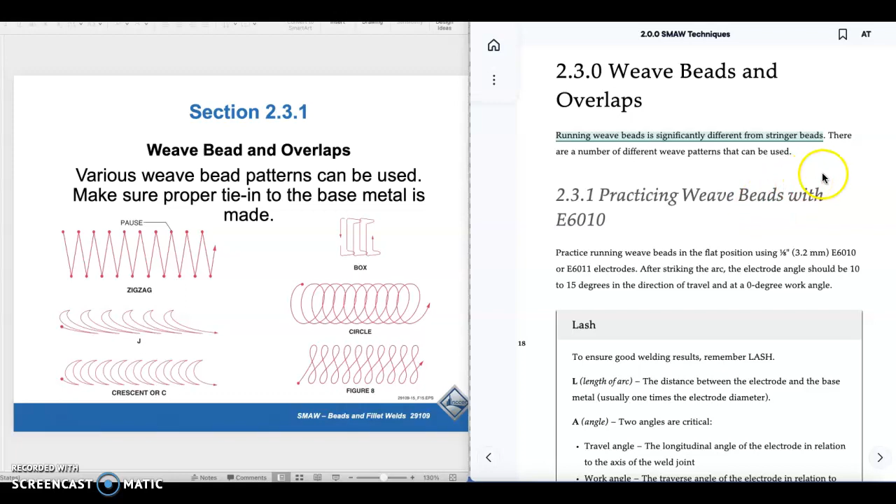Let's go ahead and start where we left off with section 2 of module 9, SMAW technique, weave beads and overlaps. Running a weave bead is significantly different from a stringer. There's a number of different weave patterns that can be used.

So practicing weaves with a 6010, practice running weave beads in a flat position using an 1/8 inch E6010 or E6011. After striking the arc, the electrode angle should be 10 to 15 degrees in the direction of travel and at a 0 degree work angle.

To ensure good welding, remember LASH. LASH is going to be some stuff that they're going to ask you about. So you need to know length of arc, angle, speed, and heat.

LASH: the length is the distance between the electrode and the base. We call it a tight arc. Keep a tight arc.

Angle: the travel angle and the work angle, the longitudinal angle of your electrode, and the traverse angle of your electrode in relation to the axis of the weld joint.

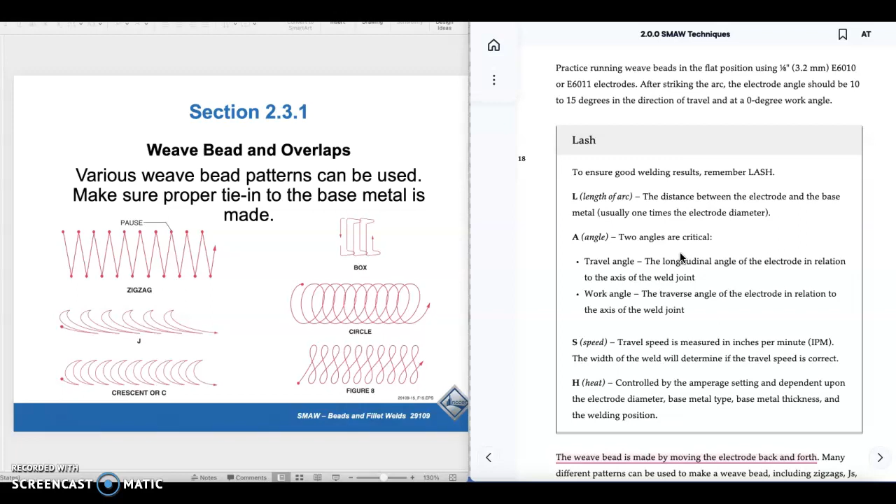Travel speed, we know what that is. Heat, that's your amp settings, depending on the electrode, base metal type, metal thickness, etc. Thicker metal, higher amps; thinner metal, lower amps.

The weave bead is made by moving the electrode back and forth. Many different patterns can be used in the weave: zigzag, crescents, boxes, circles, figure eights, upside down C's, right side down C's, you name it.

Essentially they're all some sort of a side to side that massages and manages the puddle. That's the bottom line. At the end of the day, that's what you're doing.

You're wanting to make sure you're filling in your undercut, and you're wanting to make sure you're getting good penetration. You're not overheating your metal. You're not going through the metal. You're getting proper penetration.

All those things rolled up along with the way that you manipulate your rod is a component of the weave.

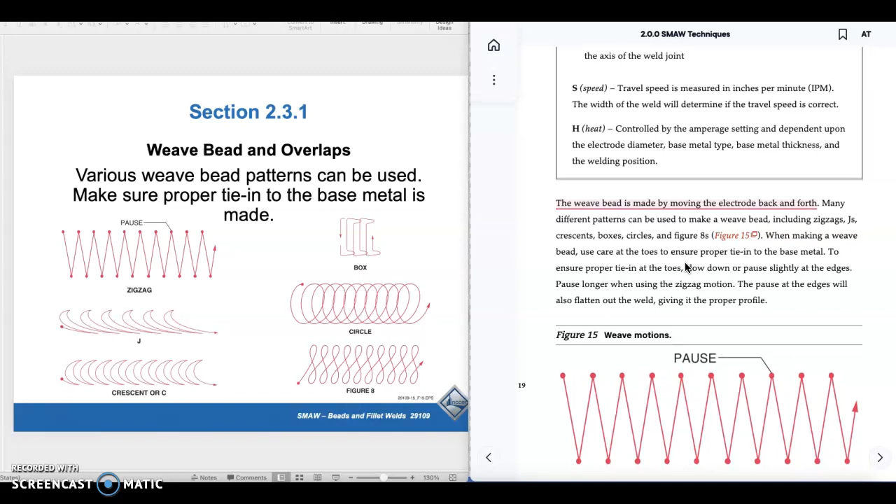So there's some examples of pause at the sides, the zigzags, the J's, the crescents. Some of these are just going to be dependent on the position that you're in, and you're going to try different things.

And some things you're going to try, it's like, I've never done this before, let me give it a try. But depending on what position you're in, what kind of metal you're working on, there's just the variables.

You can look at a puddle long enough and eventually you just develop your own. Don't take all these positions as this is it. You got to learn these. These are examples. You learn and develop your own and what works good for you.

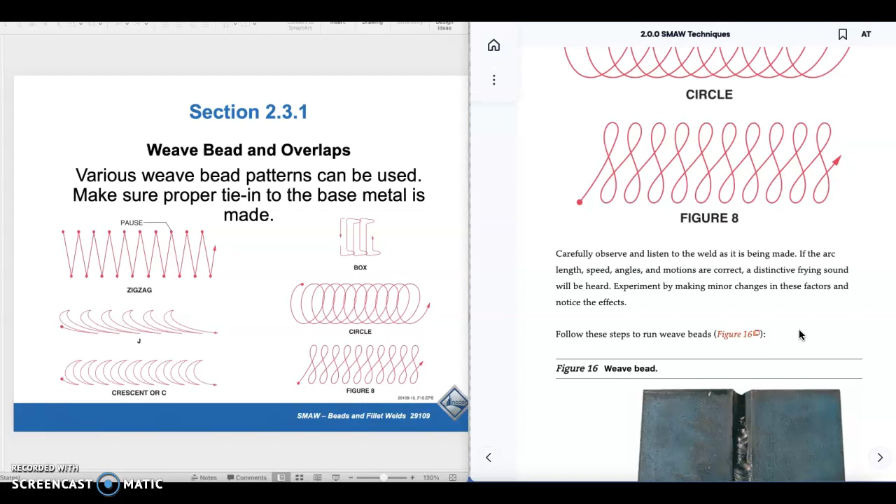Weave bead. Here's this groove weld, and looks like it's got a backing strip, or it's got a real tight root face, root opening.

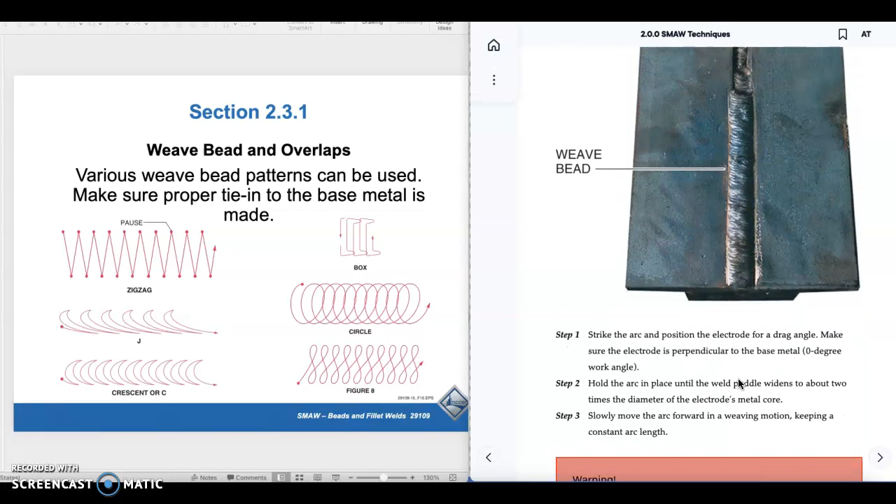Looks like a single pass weave bead, which is kind of a no-no. You want to see multi-pass. Strike the arc, hold the arc, move the arc.

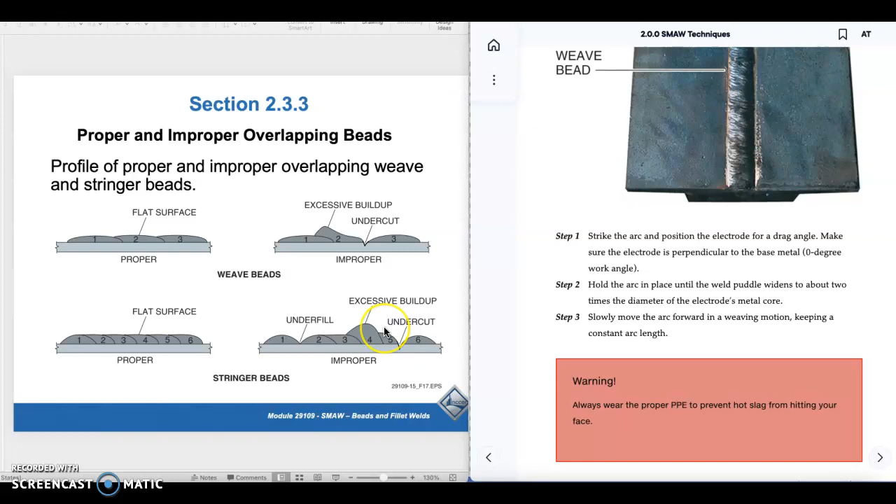Electrode work angle. Here's a pad of beads. Work angle and arc control are important for overlapping beads using 7018 electrodes.

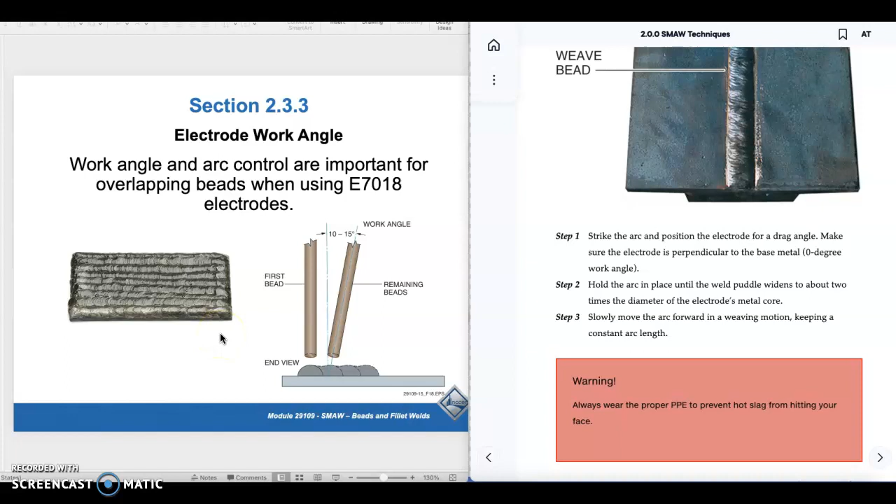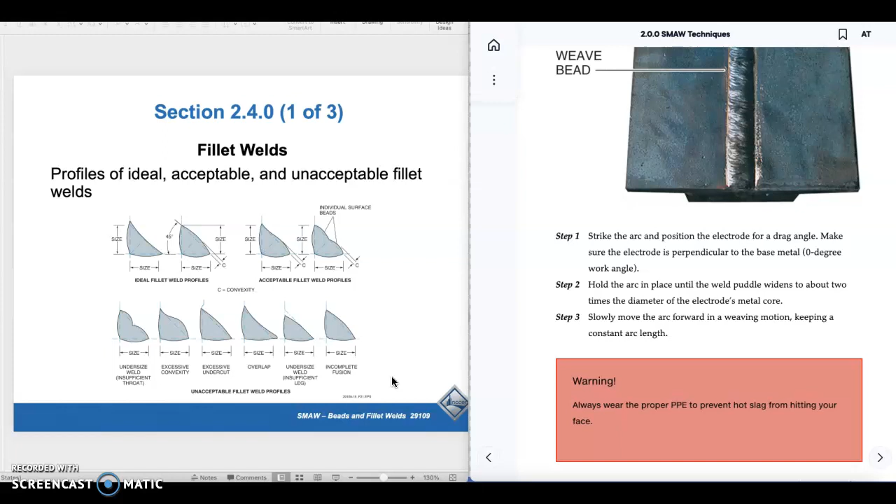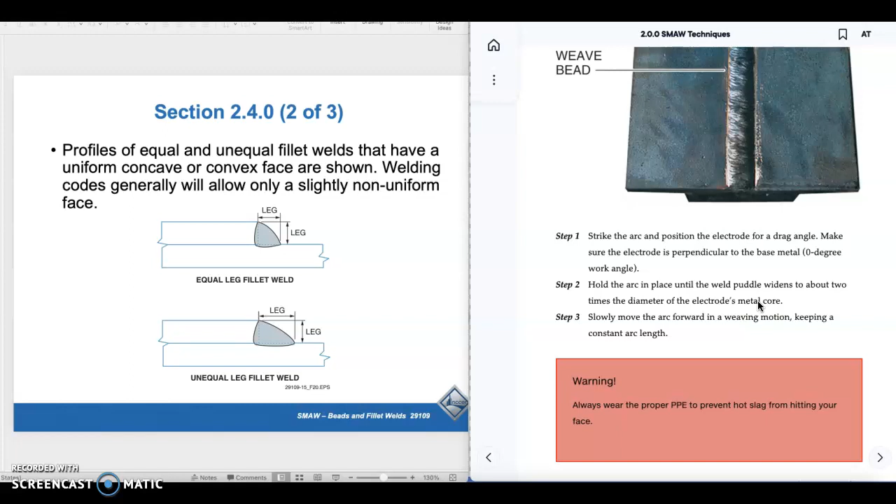Profiles of equal and unequal fillet welds that have a uniform concave or convex face are shown. Welding codes generally only allow for slightly non-uniform... okay, I think I'm getting a little ahead on the left, so let's catch up on the right.

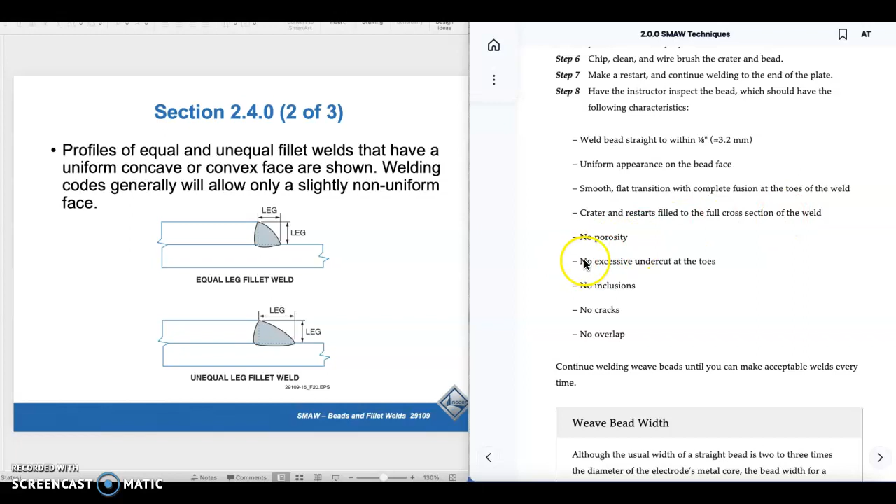Keep your bead straight, uniform, smooth, flat. Craters and restarts have to be filled in. No porosity, no excessive undercut, no inclusions, no cracks, no overlap. We know all those terms and know what to do with them. Continue welding weaves until you make acceptable welds every time.

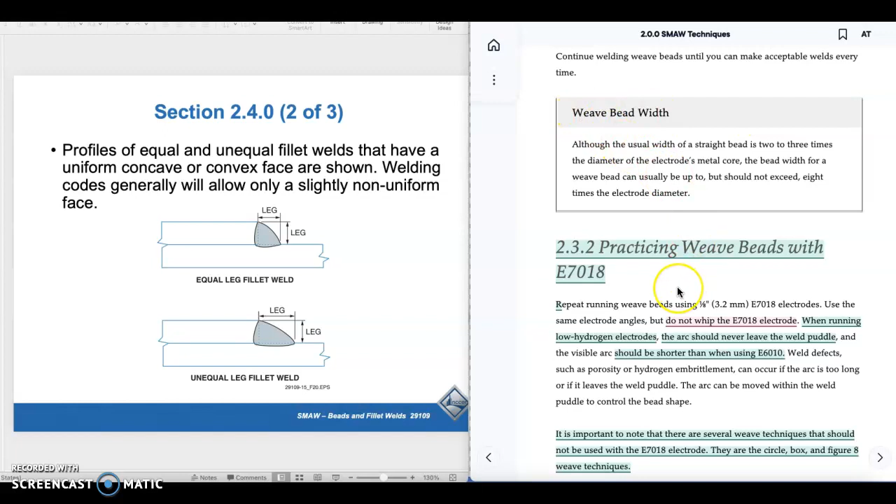Practicing weave beads with 7018. Do not whip it, it's more of a side to side motion. Bottom line, just keep the electrode in the puddle. Don't let the electrode leave the puddle. That's the number one thing you've got to remember.

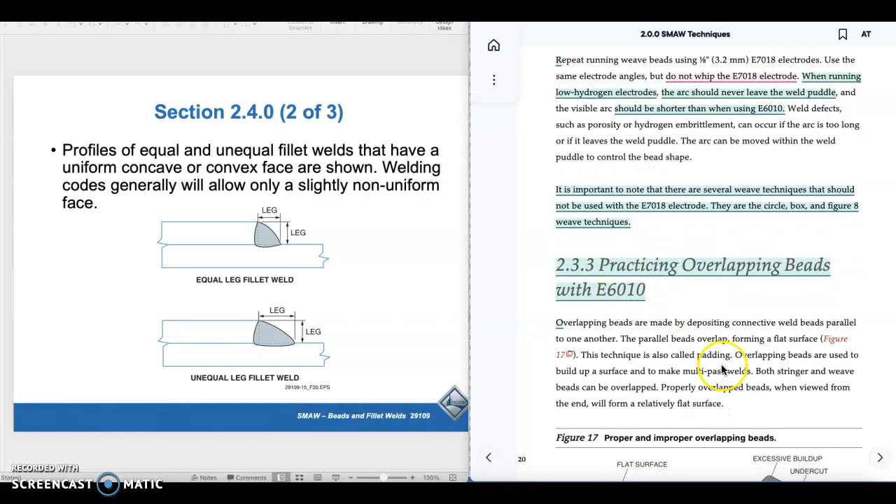In addition to not whipping it, anything excessive with the 7018 is going to give you a less than desirable result. Weld defects such as porosity and hydrogen embrittlement can occur if the arc is too long, or if your rod leaves the weld puddle. The arc can be moved within the weld puddle to control bead shape. It's important to note that there are several weave techniques that should not be used with the E7018 electrode.

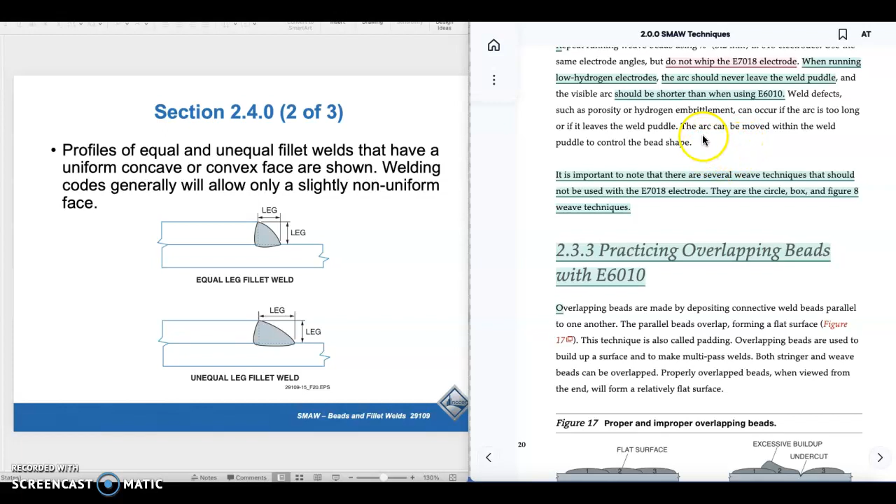They are circle, box, and figure 8 weaves. That's probably because you end up leaving the puddle. I am a big fan of that upside down C, like I'm doing with my mouse right now. Up, up, up, pause, up, pause, up, pause. Your electrode is always touching the puddle, touching the puddle, touching the puddle.

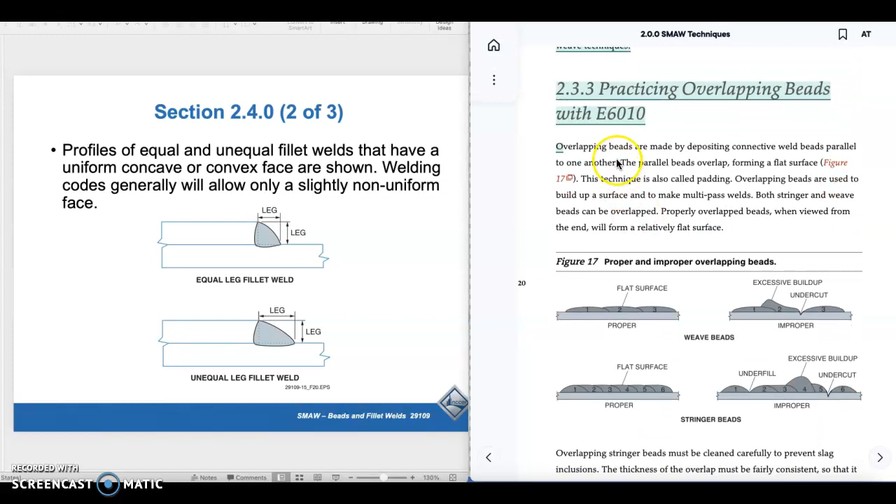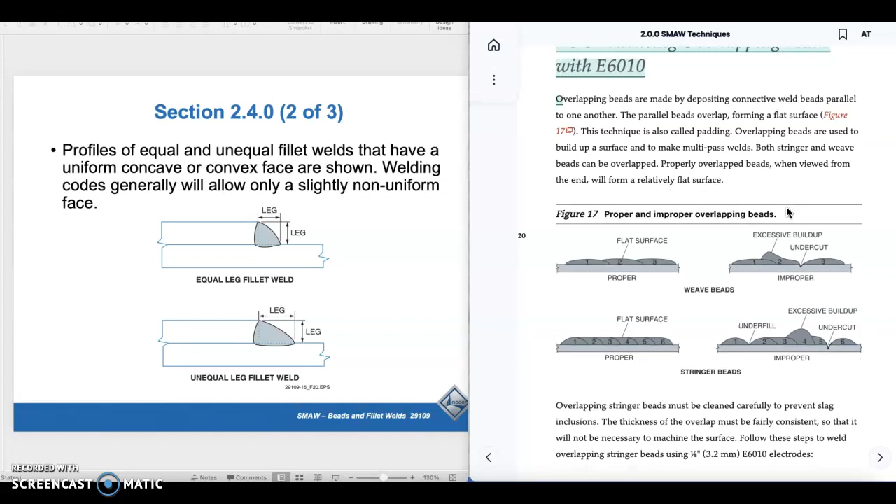That works really good, or just straight drag it. Overlapping beads with a 6010. Overlapping beads are used to build up surface and make multipass welds. Both stringers and weaves can be overlapped properly. Overlap beads, when viewed from the end, will form a relatively flat surface.

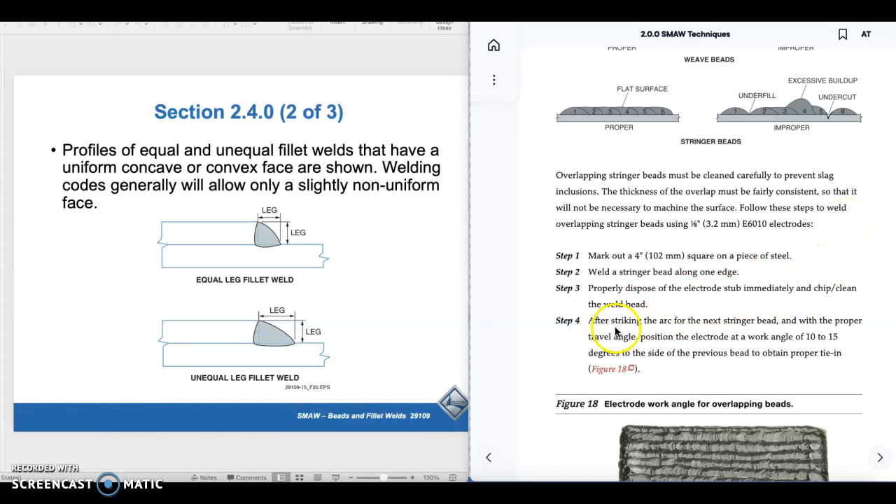Mark out a 4-inch square on a piece of steel. Weld a stringer bead along one edge. Properly dispose. After striking the arc for the next stringer, use a work angle of 10 to 15 degrees.

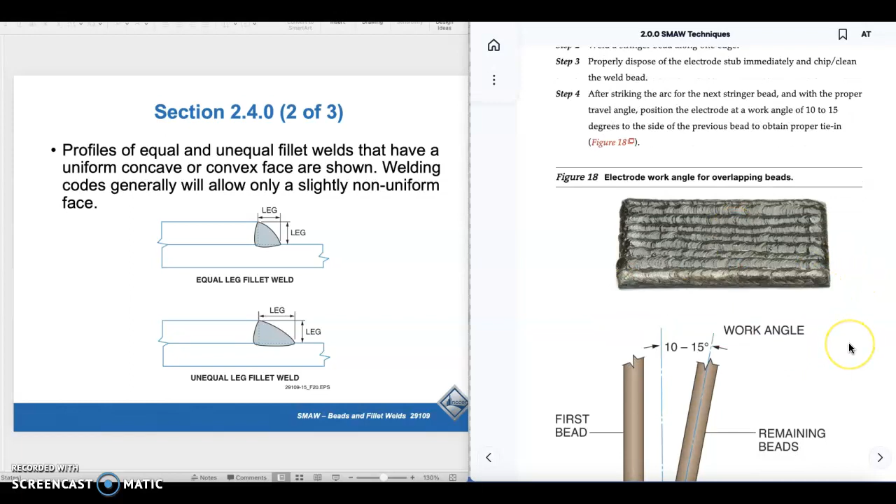Pad of beads with 6010. Basically it's the same rod angle. Continue running stringers until the marked square is covered.

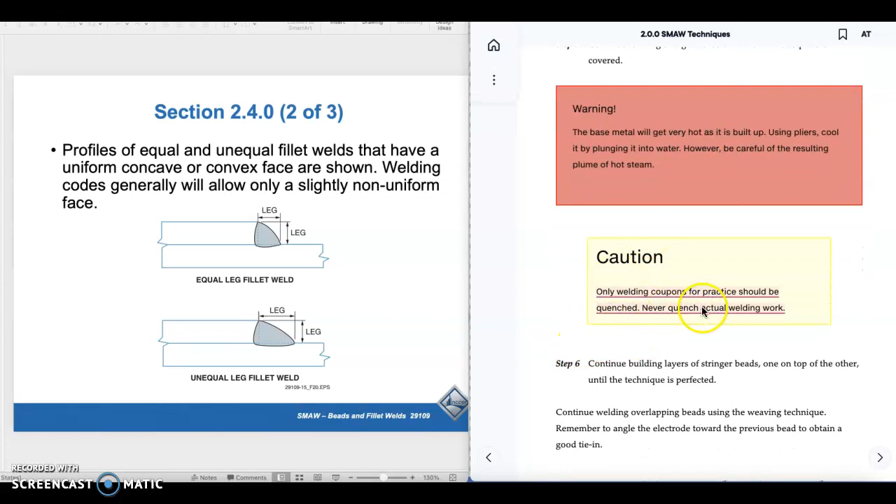In red: only welding coupons for practice should be quenched. Never quench actual welding work. That's a test question. Another one: keep a short arc, do not whip the electrode. Talking about 7018 again.

2.3.4, yeah, this is 2.4 over here. We haven't got there yet.

Repeat your welding overlapping using a 7018. Use a pad. Build a pad using stringers, then repeat building the pad using weaves. Keep a short arc. Do not whip the electrode.

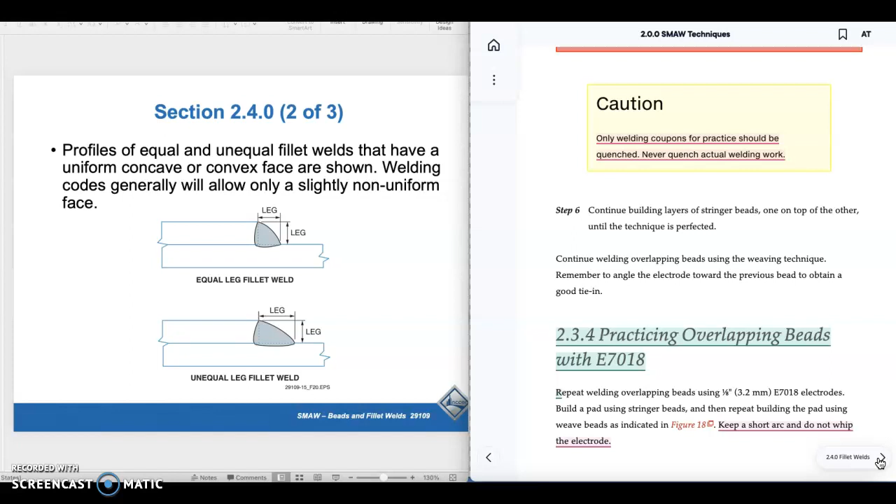A fillet weld is a weld that is approximately triangular in cross section and used with T, lap, and corner joints. The two types of fillet welds are convex and concave.

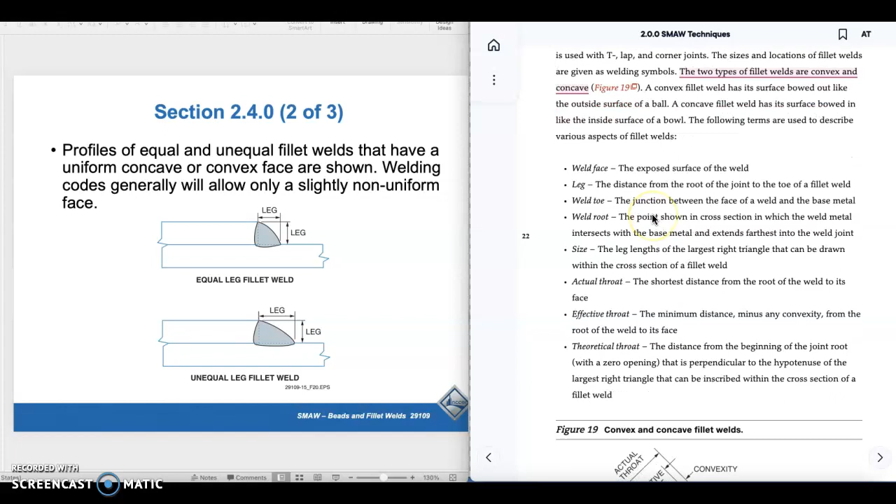Hello, Red, that's a question: two types of fillet welds, convex and concave. So if you saw a question, what are the two types of fillet welds? Convex, concave. Hello, people. Couple of trade terms here: weld face, leg, weld toe, root. If you want to, slow down and read those.

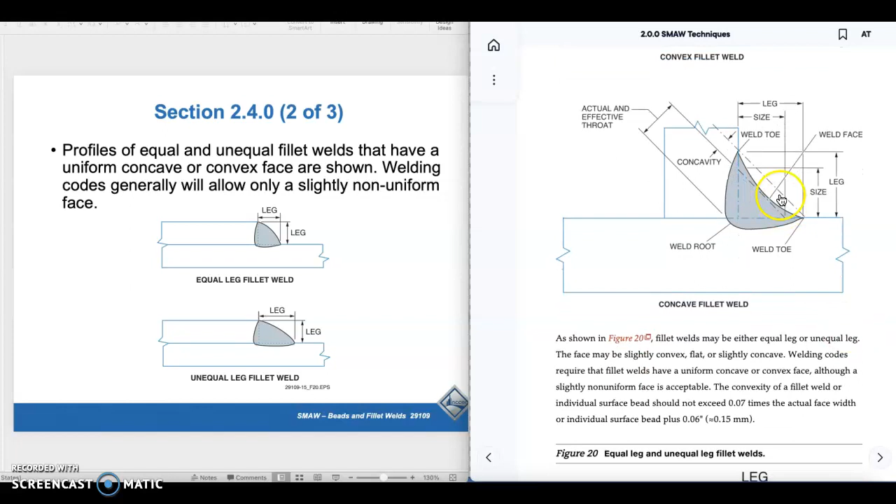Convex, concave, we talk about these in lab all the time. If it's got a hump on it, that's the convexity. If it's got a dish in it, that's concavity. Convex fillet weld, this one is concave, see how it's got a dish shape? This one is convex, see how it's got a hump shape?

Just learn them, memorize them: convex, concave. So you've got convex, flat, or slightly concave, that's okay, it's the excesses that are a problem. You can pass a weld inspection with a convex, a flat, or a slightly concave. What you can't get away with is something that is excessively convex or concave. Although a slightly non-uniform face is acceptable.

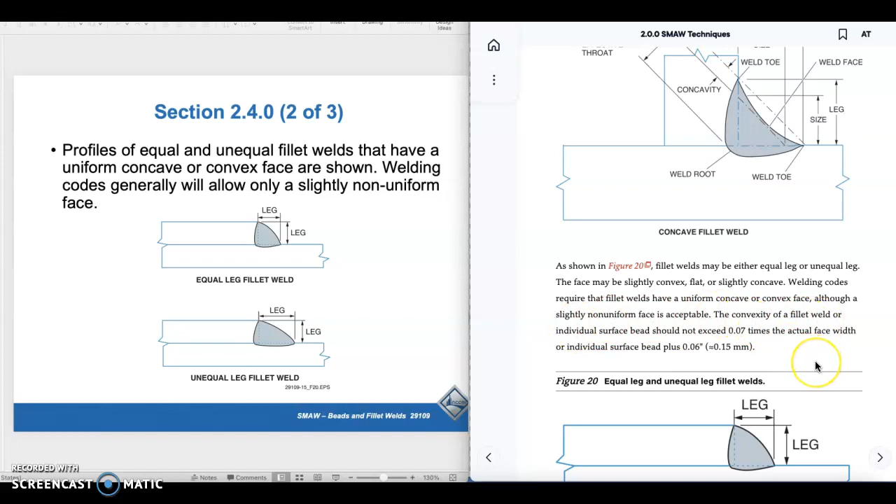Equal leg fillets, unequal leg fillets. Feel free to pause anytime you want to read something. I think you guys know all this stuff because we talk about it every day, but if you see something you'd like to review, just click the screen and pause.

In red, here we go, wonder why it's in red. That's a question: a fillet weld is unacceptable if the profile has insufficient throat, excessive convexity, excessive undercut, overlap, insufficient leg, or incomplete fusion. Each one of those things is a single item that could make a fillet weld unacceptable, so it's important to know what each one of these are.

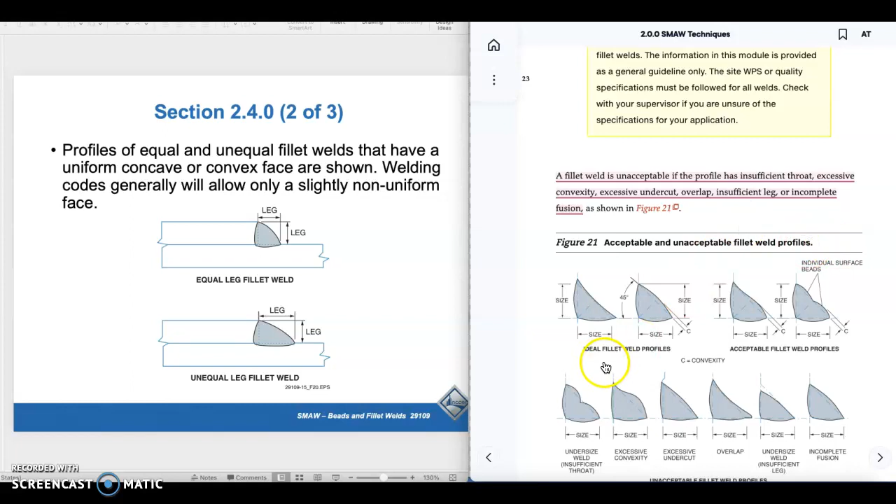Fillet welds require little base metal prep except for cleaning the weld area and removing any dross from cut surfaces.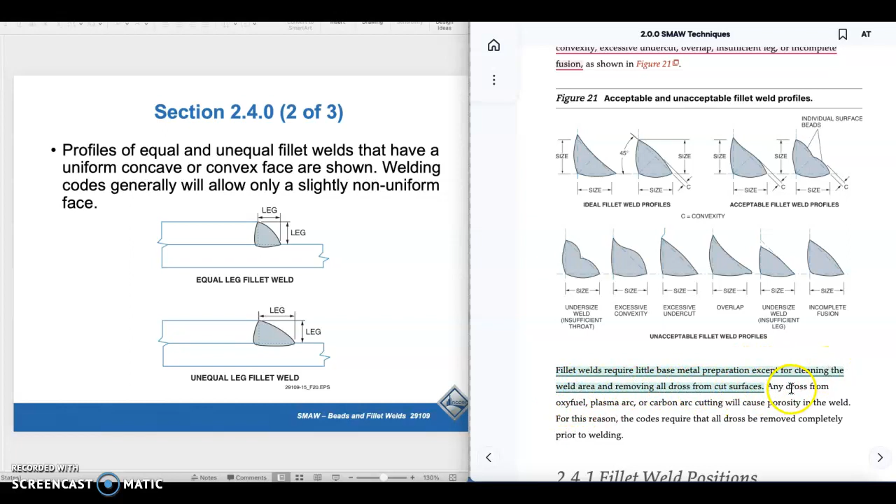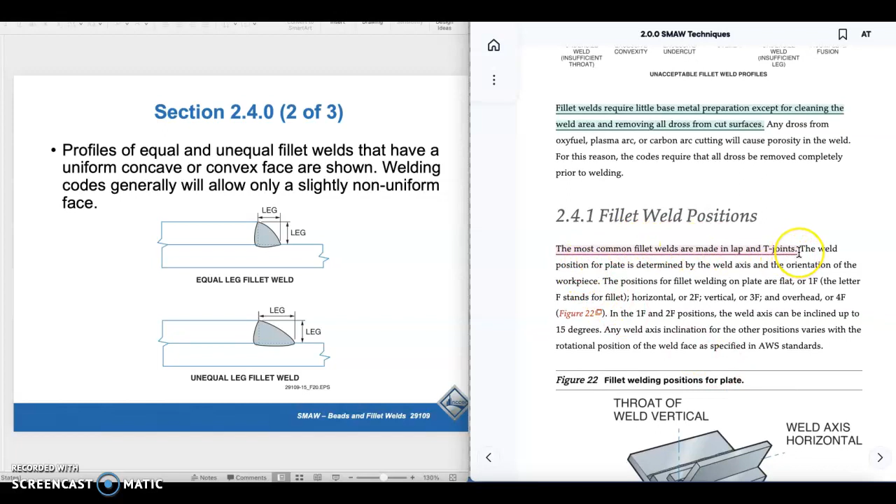The most common fillet weld is lap joints and T-joints. We know what T-joints are—there's one right there. Here's a lap, where you lay two pieces, lap one over the other, and throw a weld down. Brrr. Lap joint.

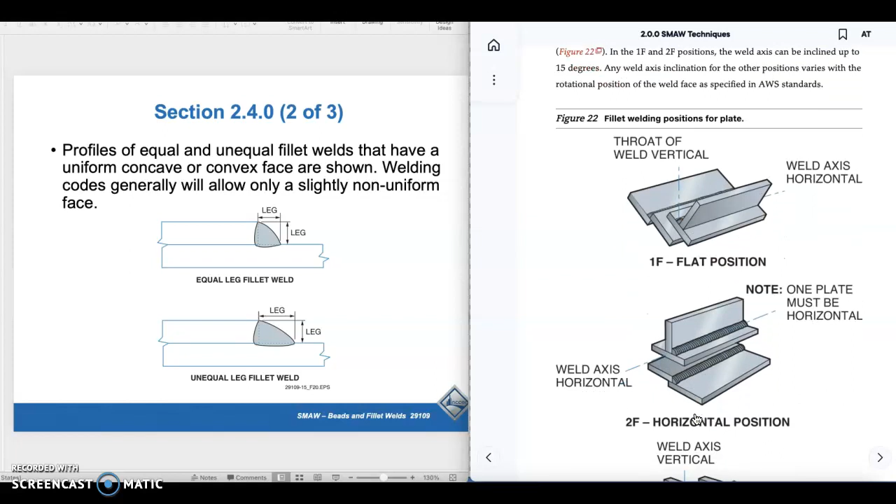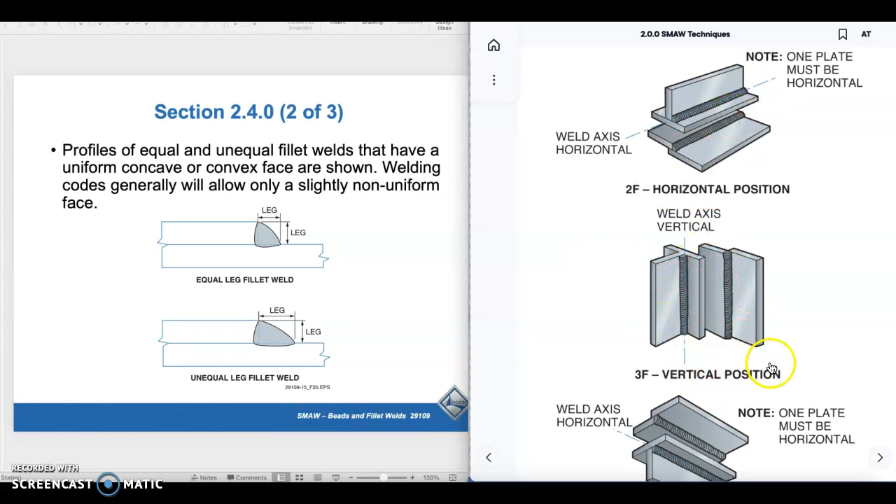Horizontal. This is a vertical. This is a 3T, and a 3 lap. And the overhead. So 2.4, let's catch up over here.

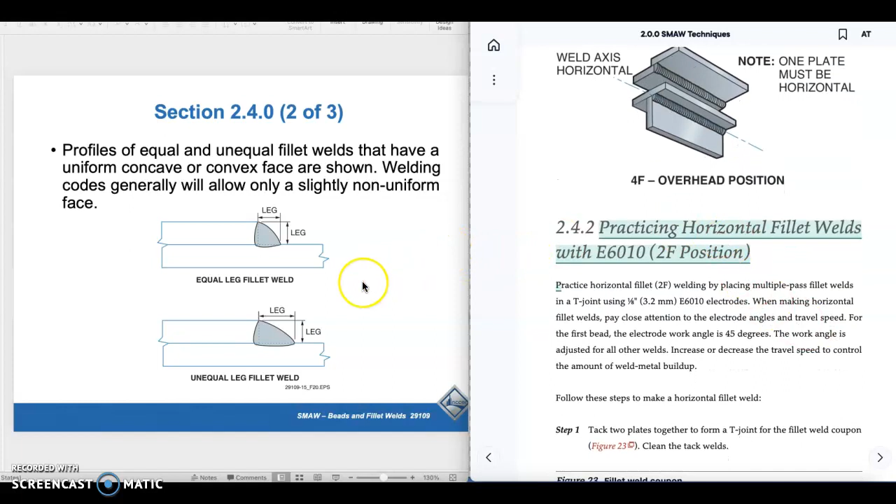Profiles of convex and concave. Convex, concave.

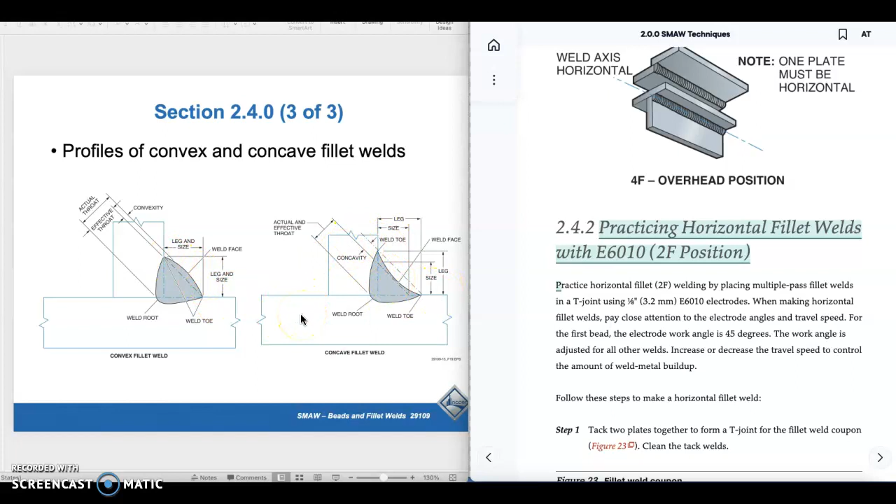Fillet weld positions are determined by the weld axis: 1F, 2F, 3F, 4F. You guys know what those are. Feel free to pause if you want to review.

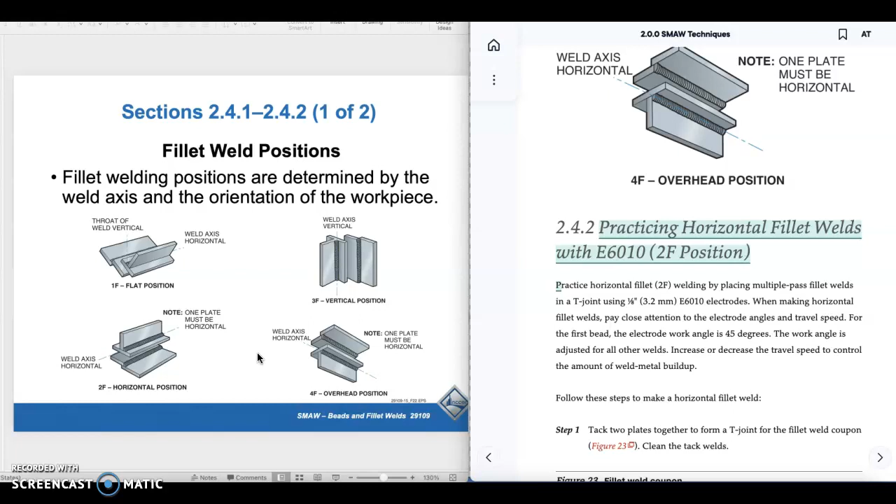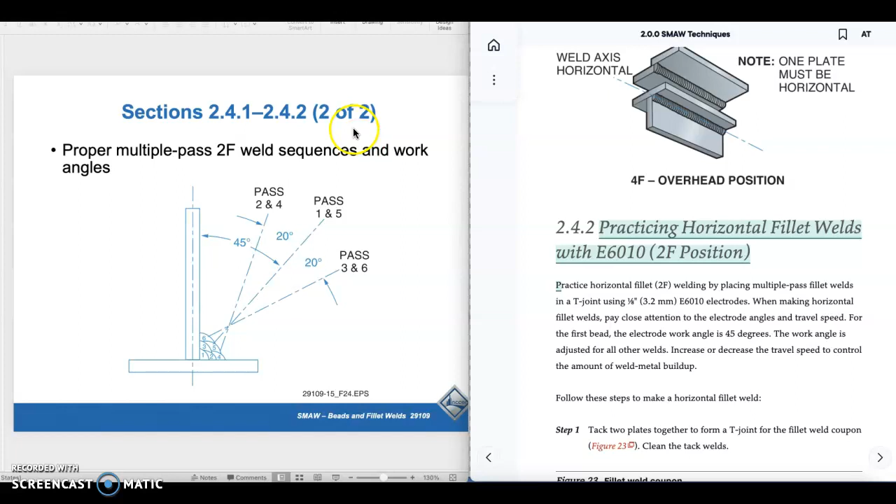2.4.1, proper multi-pass 2F weld sequence. This is a multi-pass, right here. We've been doing single passes. If you want to do multi-passes, you just lay them out: weld 1, weld 2, weld 3, weld 4, weld 5, weld 6. That becomes more important in the groove welds to us. We're not going to do a lot of multi-pass fillet welds. And those are the trade terms.

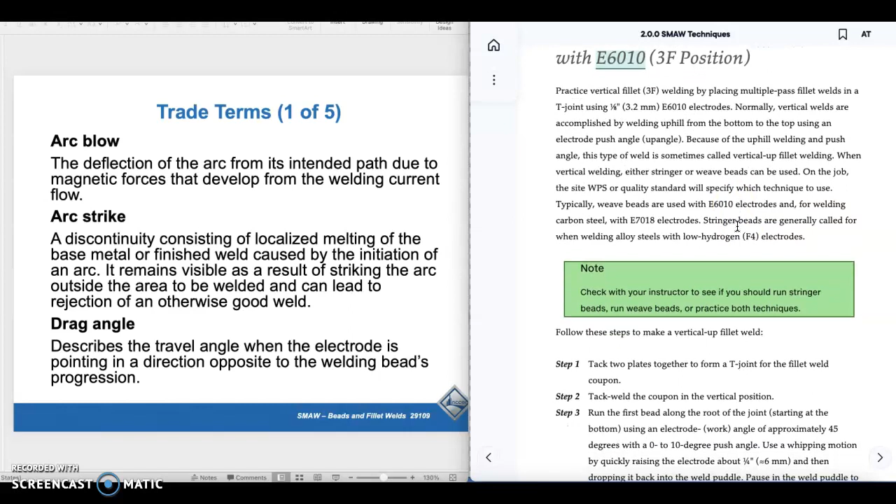Let's go back over here and turn the page. 2.4, practicing vertical fillet welds with 6-10, 3F. Here's some details. Tack them together. Run the first bead: pass 1, pass 2, pass 3. It's pretty cool.

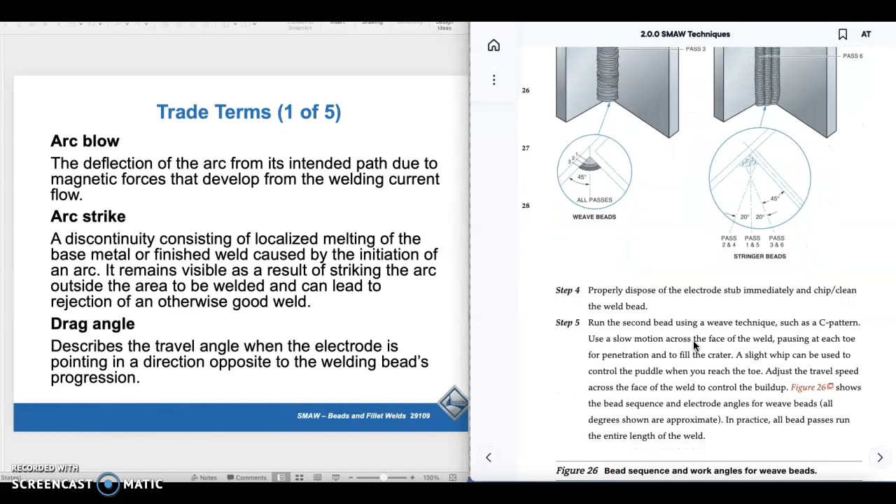Run the second bead using the weave technique, just as you see. Tack it together. Run the first bead.

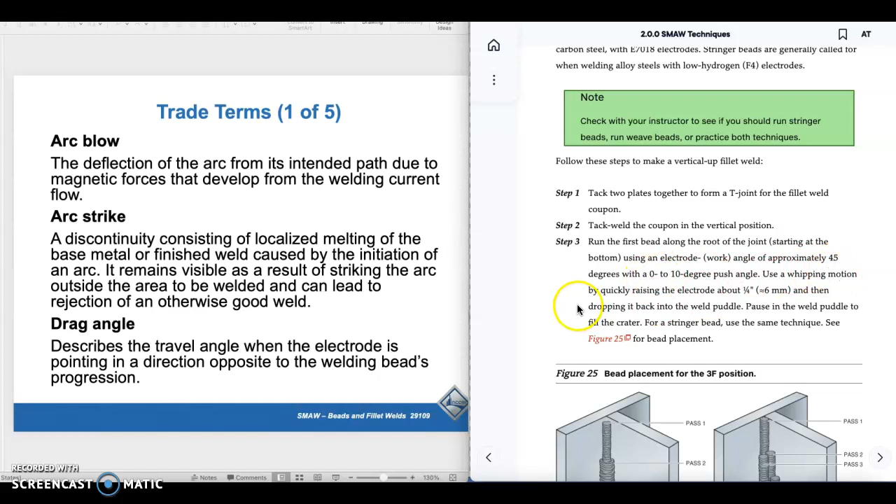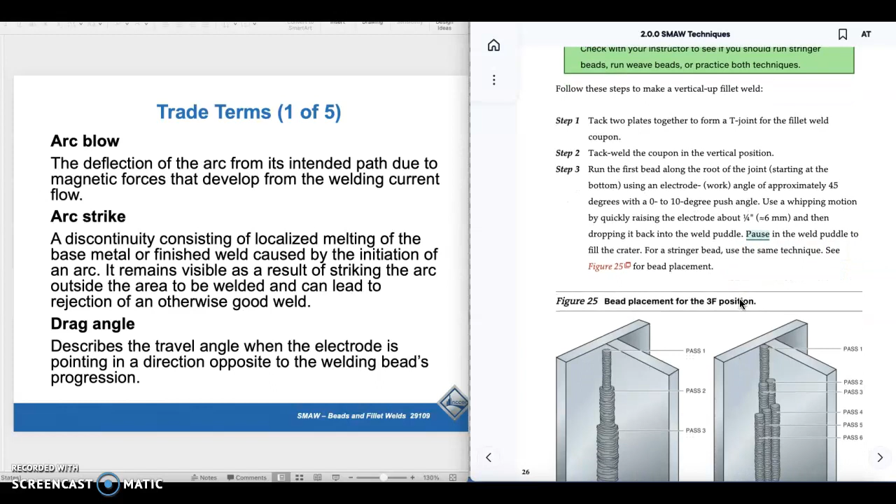Along the root, use a whip or a whipping motion, I believe is better. Drop it back into the weld puddle. There it says pause—I'm glad the book agrees with me. Pause in the weld puddle, fill the crater. So root pass on T joint 6010.

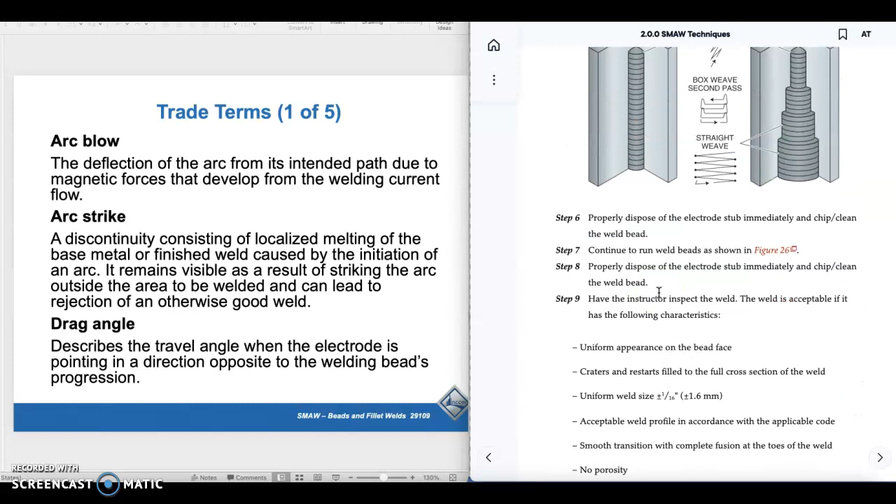Whipping pause. Second pass is a weave, such as a C. Slow motion across the face. Highlight that, just because I think it's important.

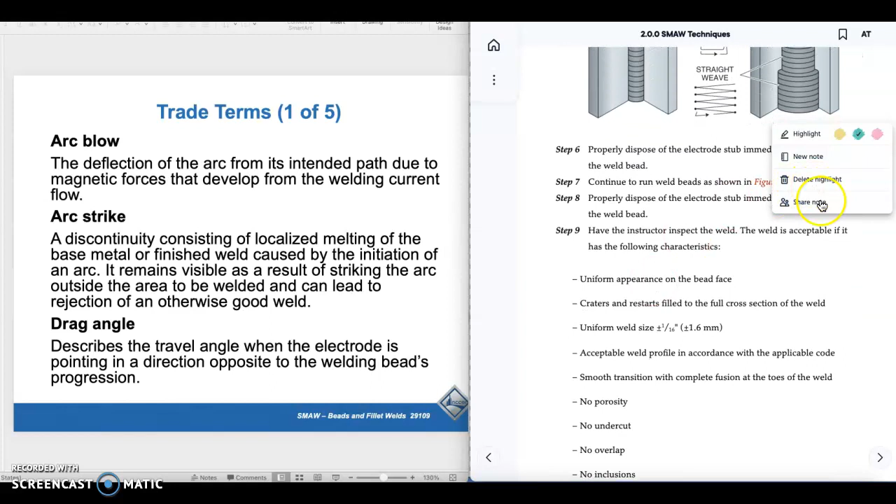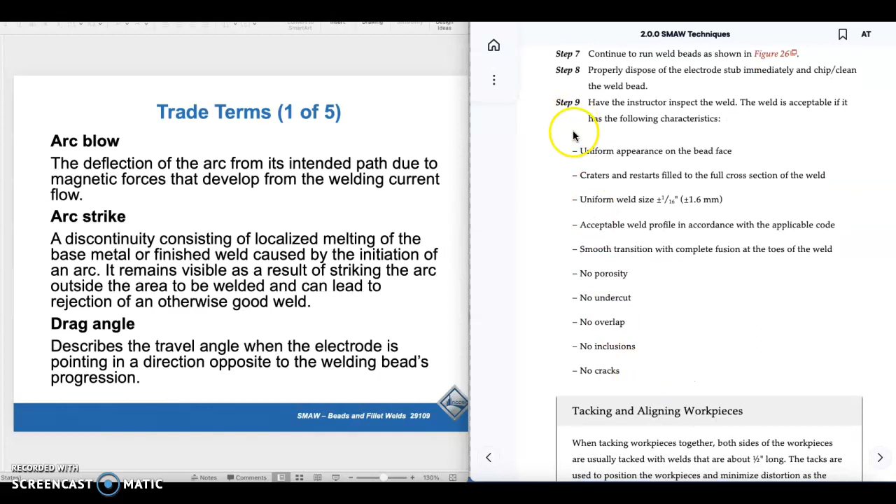Properly dispose—you're all big on disposing. Continue to run weld beads. Properly dispose, have the instructor inspect the weld. The weld is acceptable if it has the following characteristics. Every time, same characteristics—this list is on every inspection. You know how to inspect one weld, you know how to inspect a lot of welds.

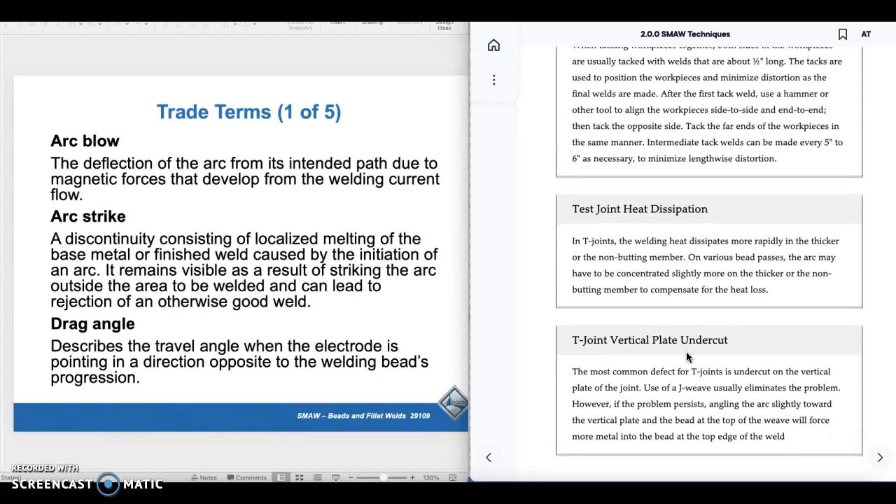Tacking and aligning. Test joint heat dissipation. In T-joints, the welding heat dissipates more rapidly in the thicker or non-butting member. On various bead passes, the arc may have to be concentrated slightly more on the thicker T-joint vertical plate.

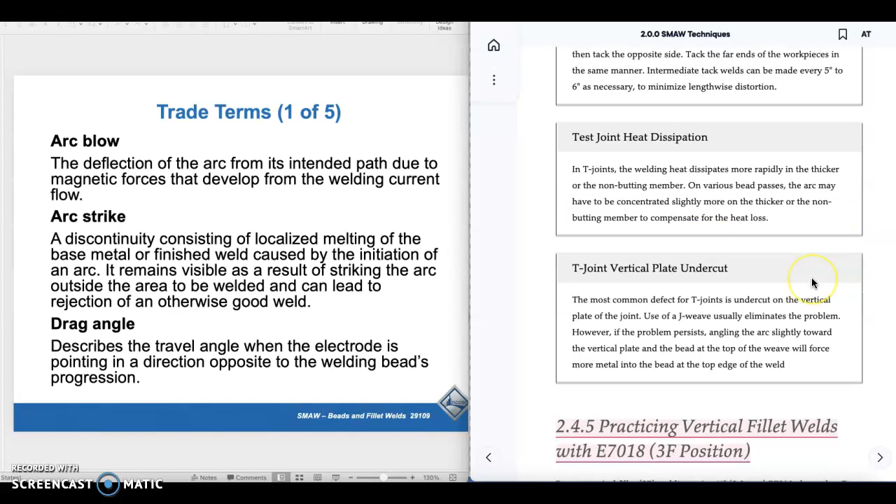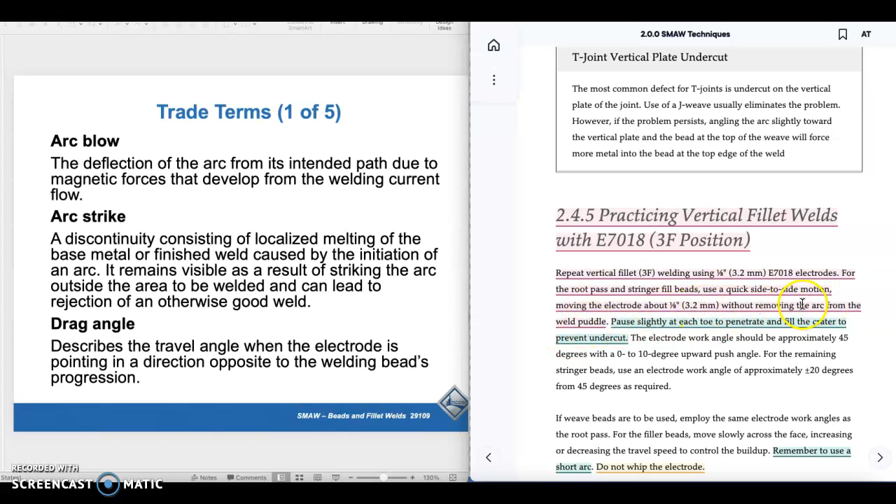Oh, here's something in red. Repeat vertical 3F using, for root pass and stringer beads, a quick side-to-side motion, moving the electrode without removing the arc from the weld puddle. 70-18. Anytime you see the words 'don't remove the arc from the weld puddle,' think 70-18. That's what they're talking about.

Overhead. Steps. A 10 to 15 degree angle. Slight oscillation, circular side to side, for the overhead.

Around the second bead, overlap 75% of the first bead. That's a lot of overlap. Pass 1—that's real similar to the other.

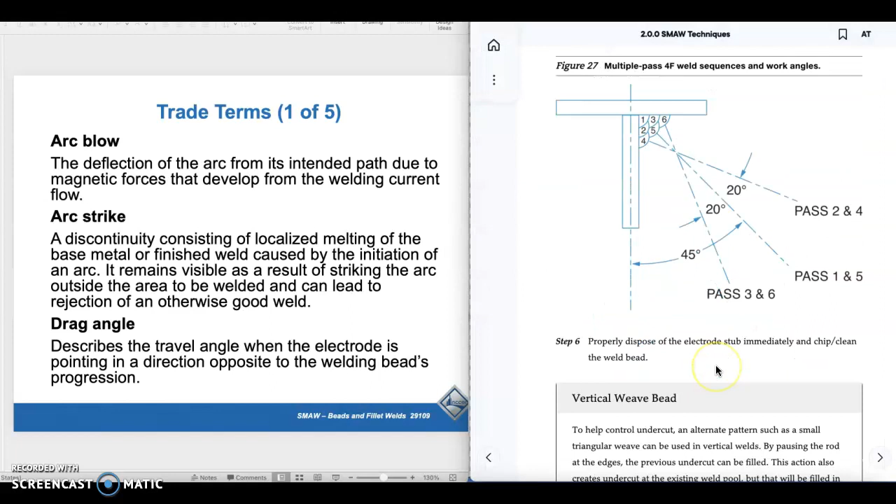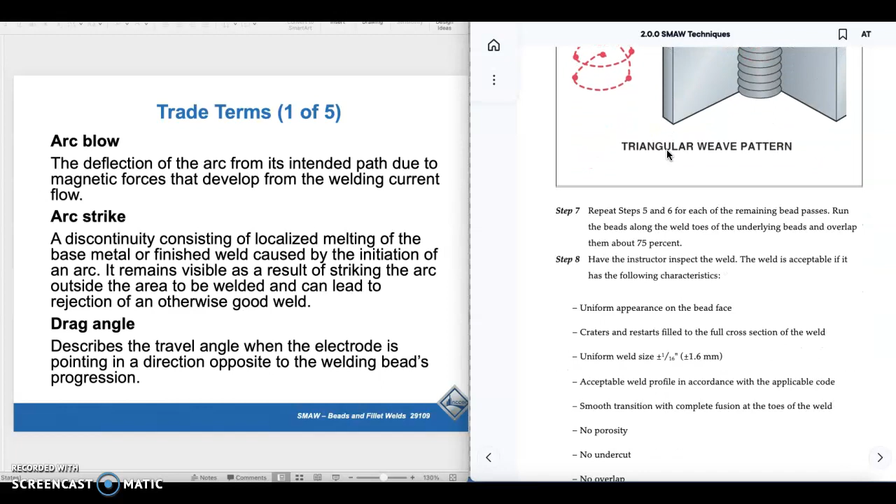Vertical weave: to help control undercut, alternate patterns such as a small triangle weave can be used in vertical welds. Repeat Steps 5 and 6. Inspect the welds.

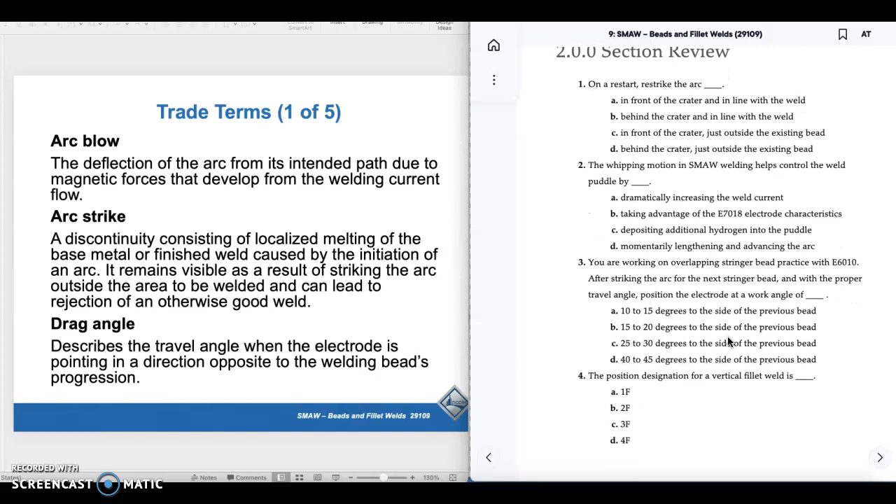And that's it—section review. These are all questions that you'll see on your test.

In summary, striking an arc, running stringers and weaves, and making fillet welds are basic and essential skills. Even the method used in striking an arc can reject a weld. Developing and honing skills in the booth allows welders to progress to more difficult procedures. It's important to practice these welds until acceptable results can be achieved. Welds can be formed in different positions: flat, vertical, horizontal, overhead. It's necessary to use various types of electrodes when welding in different positions.

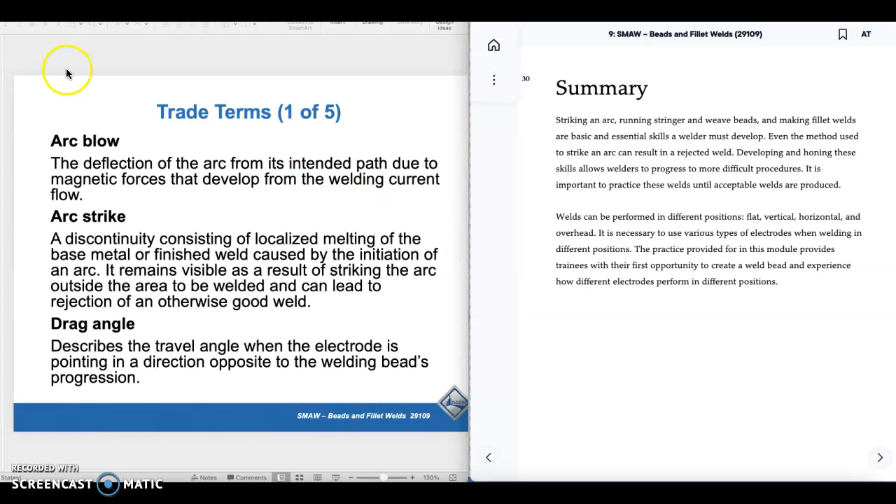The practice provided for this module gives trainees the first opportunity to create a weld bead and experience how different electrodes perform in different positions. That's awesome—we're through with this module.